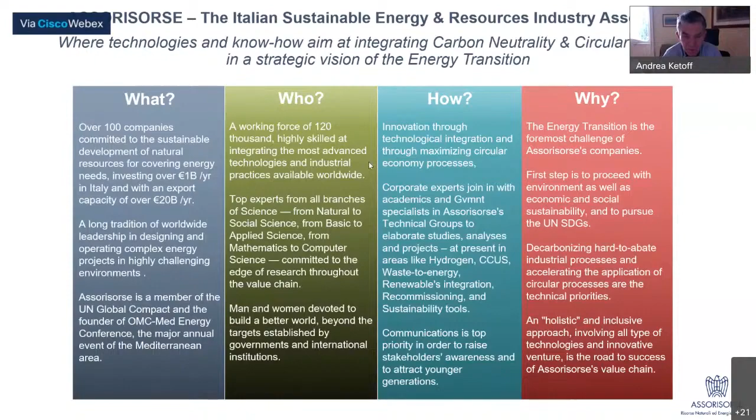Thank you. So thank you very much, Andrea. Thank you very much, Nicola and Paolo, for your kind and important words with respect to the importance of this type of initiative.

So now we are really getting into the award itself. The word goes to Marco Brignoli, who is the scientific committee coordinator of this specific activity. So Marco, the floor is yours.

Thank you, Alberto. First of all, congratulations to the winners of the prize and the mentions, and congratulations to the students who joined this contest. I'm really proud to say that over the 28 years of its existence, 2020 marked really the top success of the contest, as you can see from the statistics we have prepared.

We have received this year 70 theses, which for me is a most significant result, given the hard times we were living through, due first of all to the low price of commodities and the COVID-related difficulties in 2019 and 2020. This means that teaching and science still play a fundamental role in the development of industrial activity.

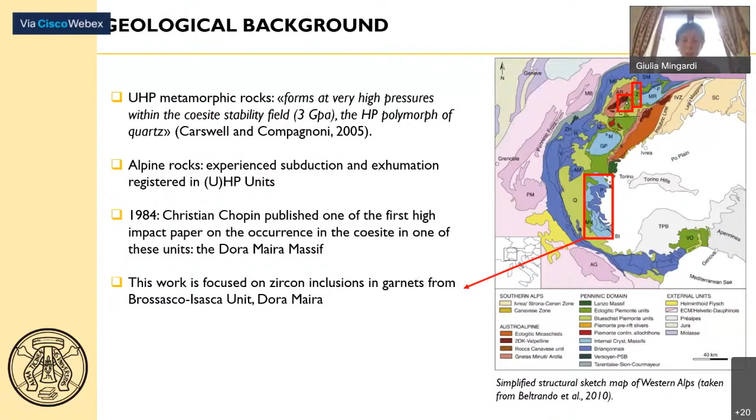The rocks were metapelites, and they are characterized by the following mineral assemblage, which consists mainly of garnet, quartz and coesite, phengite, kyanite, chlorite, and chloritoid that are present also as inclusions in the garnets. But other inclusions are micas and, of course, zircon. A thing that I would like to underline is the fact that the garnet porphyroblasts present in these metapelites show a clear zonation.

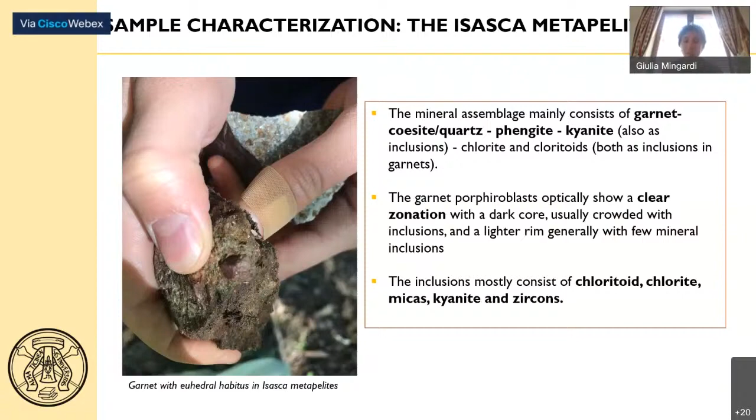So they have a dark core, which is usually crowded with inclusions, and a lighter rim with few mineral inclusions. And this is the place that I considered most for the application of the elastic geobarometry, because for the selection of the inclusion, we should check the following characteristics. They should be monocrystalline, isolated from other discontinuities and inclusions, and that's why the rim is a perfect place to find them, and with a size ranging from 10 to 20 microns.

So after the selection of the inclusions, I performed Raman spectroscopy on completely buried inclusions. And as we can see in the picture, the peak of the inclusion shows a shift with respect to the peak of the standard. This is the starting point for calculating the entrapment conditions, because with this shift, we can calculate the residual strain acting on the inclusion. We are considering zircon inclusions that are tetragonal, so we are considering only two independent components, epsilon 1 and epsilon 3 of the strain, because epsilon 1 will be the same as epsilon 2.

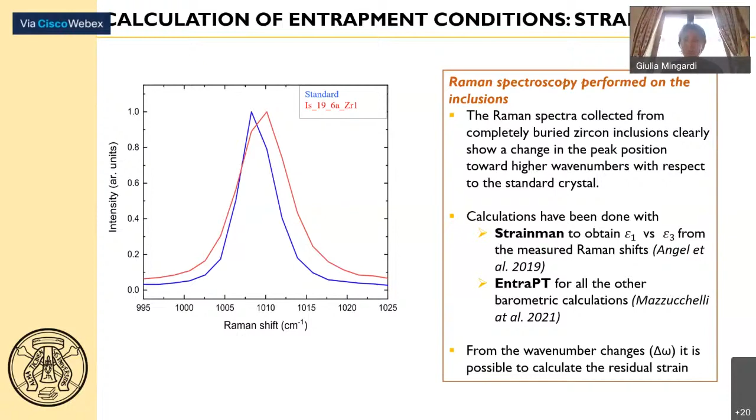I calculated the residual strain from the wavenumber changes with a software that our group developed called Strainman, and then all the other barometric calculations from the strain to the entrapment condition with the software that we developed called EntraPT. So I plotted the strain results in these two plots, which represent the strain data with respect to the independent components epsilon 1 and epsilon 3. In the plots, we can see the red dots that represent the strain data with their confidence ellipses, so an area where we can find the strain with equal probability due to the error.

Then we can see dashed lines that are the isochores, so lines where the volume strain is the same, a blue line which represents the line of isotropic strain, where epsilon 1 is the same as epsilon 3, and the line of hydrostatic stress. As we can see, most of my strain data plot near the blue line of the isotropic strain, but especially in this second plot, we can see a dispersion of the strain along different isochores. Why do we have this dispersion?

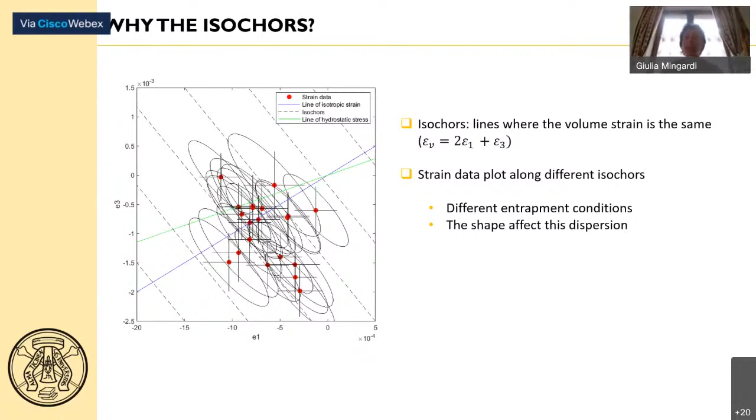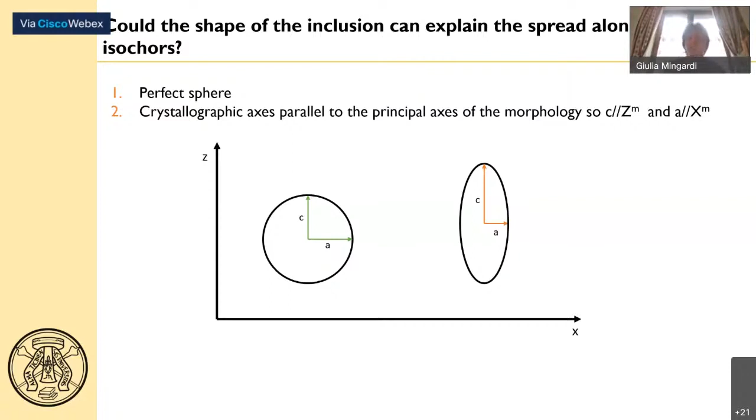So the strain plots along different isochores for two different causes: either different entrapment conditions, but I did not have the time during my bachelor thesis to analyze this aspect, we are working on it, or an effect of the shape of the inclusion. So I created a model where I analyzed two different shapes, a perfect sphere and an ellipsoid with the crystallographic axes parallel to the principal axes of the morphology. And I considered a metamorphic condition, which is in this case 4 GPa and 700 degrees.

And I obtained this result. As we can see, this is the plot of the model that I used. And we can clearly see that the sphere plots along one isochore and the ellipsoid plots along another isochore. So this model that considers the shapes of the inclusion can explain what we have observed in the natural samples. From this point, I was able to calculate the residual pressure acting on the inclusion, and I obtained a mean residual pressure of 0.49 GPa.

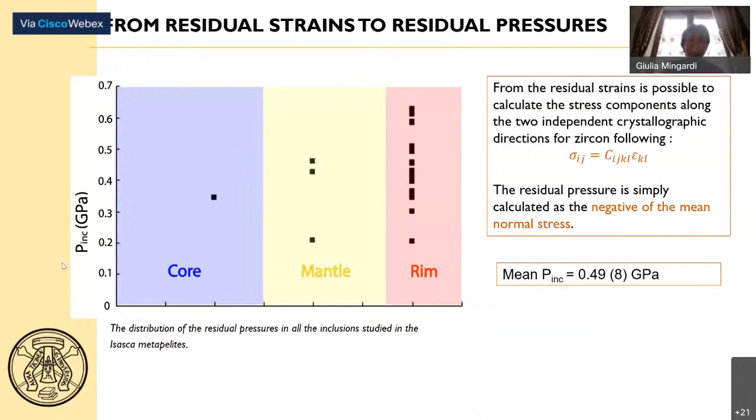I plotted the residual pressure with respect to position in the garnet, so I considered the core, the mantle, and the rim. And also here we can see why the shape is so important in my case, because most of the inclusions are at the rim, so they were entrapped at the same condition. So the shape is very important for understanding the dispersion along the isochores. But we have a problem here, because our inclusions show a very low residual pressure, which translates to an entrapment condition corresponding to 0.5 GPa and 600 degrees.

I plotted my results with the previously published results obtained by Rubatto and Hermann, which show the metamorphic evolution of the Dora Maira. And this was not very good news for us, because we can see that my conditions are very low pressure and 600 degrees for temperature.

But the good news is that we compared my results with the results obtained by Campomenosi et al. on the white schist, which are a different lithology in the same unit of the Dora Maira, and both of our results show the same thing: entrapment conditions at 0.5 GPa and 600 degrees. We explained this situation with a possible reset of the conditions at this point of the PT path of the Dora Maira, and we are now working on it.

So in conclusion, my work represents the first application of elastic geobarometry to the metapelites from the Brossasco-Isasca unit in the Dora Maira massif. We have seen that the dispersion of the strain along different isochores is probably due to the effect of the shape of the inclusion. And my results provide evidence of a general post-entrapment elastic reset of the host-inclusion system along the retrograde path of the Dora Maira massif near 600 degrees and 0.5 GPa for pressure.

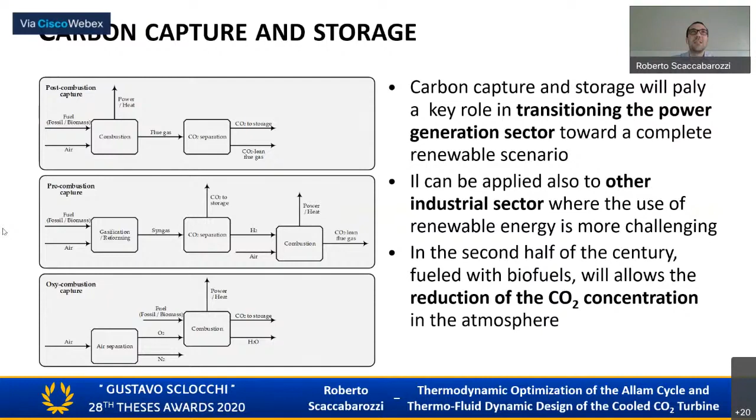You can change the slide. Okay, that's working.

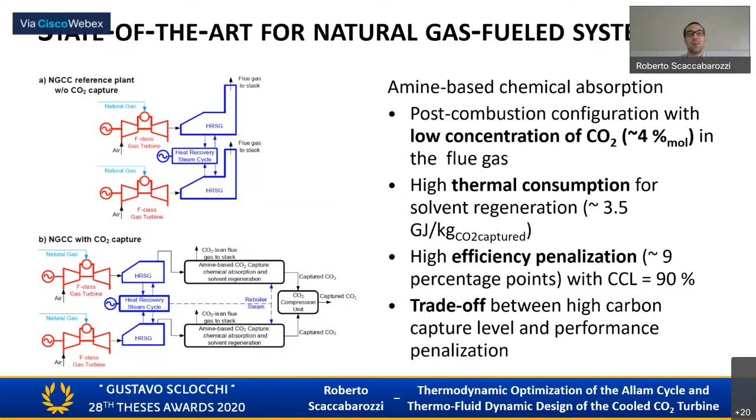Natural gas power system is the amine-based chemical absorption process. It is a post-combustion configuration with low concentration of CO2 in the flue gas and has a high performance penalization. The higher the carbon capture level, the higher the performance penalization derived from the carbon capture system.

On the other hand, the Allam cycle is a semi-closed intercooled regenerative oxy-combustion cycle using CO2 to moderate the flame temperature. First, the working fluid is intercooled compressed up to supercritical condition. Then it is pumped to maximum cycle pressure and it is split. Part is mixed with the oxygen provided by an air separation unit to produce the oxidant stream. Part is used as coolant in the expander, and the remaining part is used to moderate the flame temperature.

All the streams flow through the regenerator and are preheated. Then the oxidant and the temperature moderator are fed to the combustor with the fuel and exit at around 30 megapascal and above 1350 Kelvin. The stream is expanded down to 3 megapascal in the cooled expander, and then it flows through the hot side of the regenerator, providing heat to the cold stream. Finally, the condensation of the water is completed, the water is removed, and a small fraction of the stream is sent to storage.

This is the temperature-specific entropy diagram of the cycle, generated considering pure CO2 as working fluid. At the bottom, there is the intercooled compression with the injection of the oxygen. Then in light blue is the cold side of the regenerator, the combustor in red, the cooled expander in orange, and finally the hot side of the regenerator and the condenser in yellow and green.

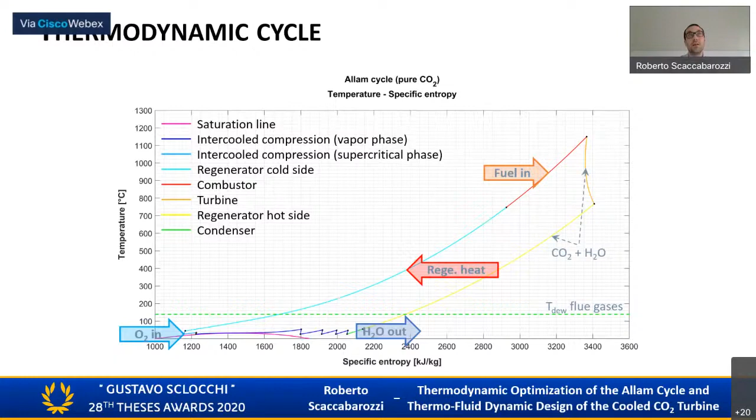According to the inventor, it is possible to reach 60% net electric efficiency with reduced capital cost and a simple layout, and without any kind of emission, both of CO2 and pollutants. An independent study of the IEAGHG partially confirmed the claims of the inventor, comparing the Allam cycle with 3 other oxy-combustion cycles. The results show that the Allam cycle is the best option, both from an efficiency and cost point of view.

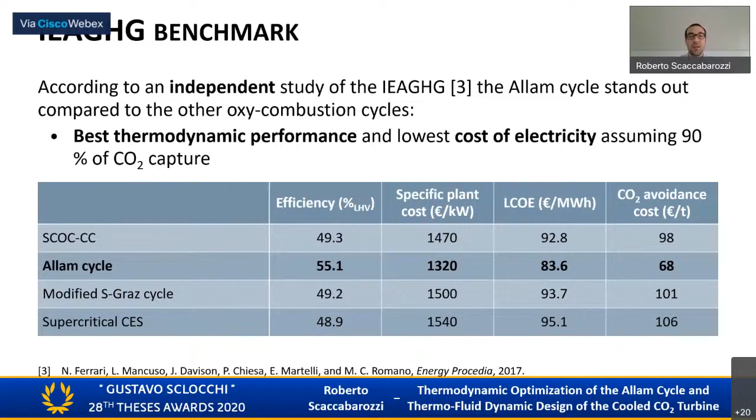The main design challenges of the Allam cycle are related to the high temperature, high pressure components: the combustor, mainly due to flame stability and ignition; the regenerator, due to the high transfer area, the superalloy for the high temperature operation, the corrosive behavior of the condensing water-CO2 mixture, and the high pressure difference of the streams. Finally, the turbine, because it is a first-of-a-kind machine with unknown design criteria, the mechanical resistance of the parts is challenging, and again, the corrosive behavior of the working fluid.

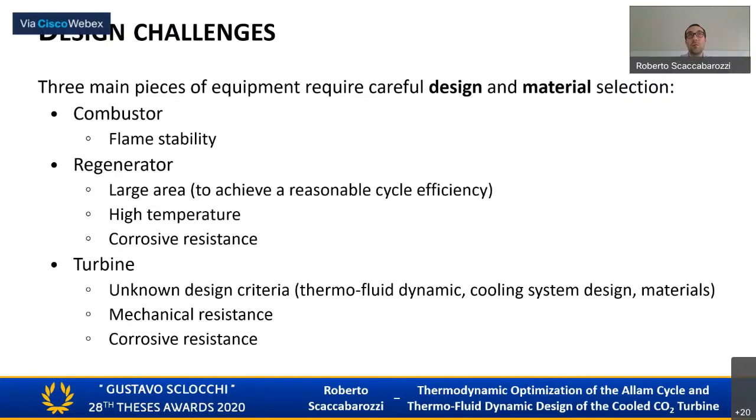8 Rivers Capital is building a 50 megawatt demonstration plant in Texas, aimed at testing the components and actual operating conditions, collaborating with Toshiba, which is providing the combustor and the turbine, with Heatric, which is providing the regenerator, and Air Liquide, which will provide the oxygen from a nearby air separation unit.

The objectives of the thesis: assess the maximum achievable efficiency and operating conditions of the Allam cycle and perform a techno-economic assessment of the technology. Study the preliminary design and performance of the expander. Assess the operational flexibility of the cycle, analyzing the part-load control strategies, and develop a new cycle configuration, coupling it with a solid oxide fuel cell to further increase the cycle performance.

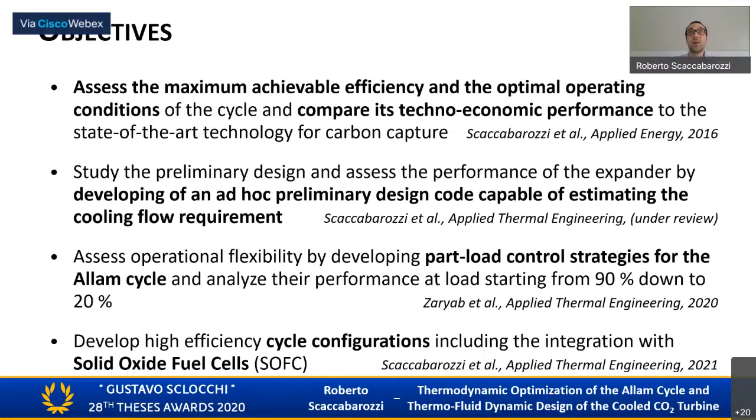investment. The sensitivity analysis shows that the most critical assumptions are the minimum cycle temperature, which affects the performance more than in a conventional combined cycle; the minimum temperature difference within the regenerator, which highly affects the investment cost; the air separation unit specific power consumption, which is the main auxiliary of the cycle; and the effectiveness of the turbine cooling system.

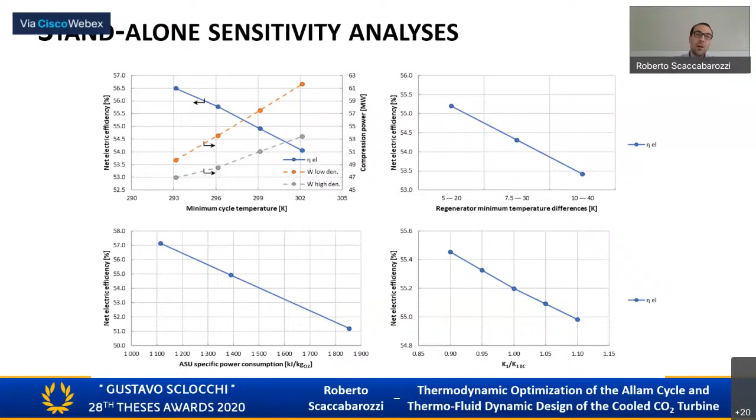The techno-economic comparison with the reference case of the combined cycle with and without CCS, and the second most promising oxy-combustion cycle of the IEA report, the Semi-closed cycle, shows that the Allam cycle remains the best oxy-combustion option and shows a cost of electricity and CO2 avoided less than 10% higher than the actual state-of-the-art technology.

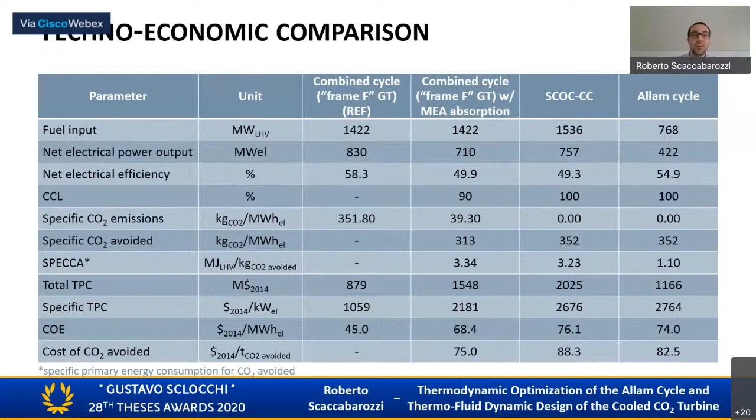So the Allam cycle with optimal operating variables can achieve a net electric efficiency of 55.2%, and accepting a performance penalization of 0.3 percentage points allows reducing the maximum operating temperature of the regenerator below 1000 Kelvin. Finally, the higher efficiency and low carbon emissions allow achieving electricity and CO2 avoided costs only marginally higher than the state-of-the-art technology.

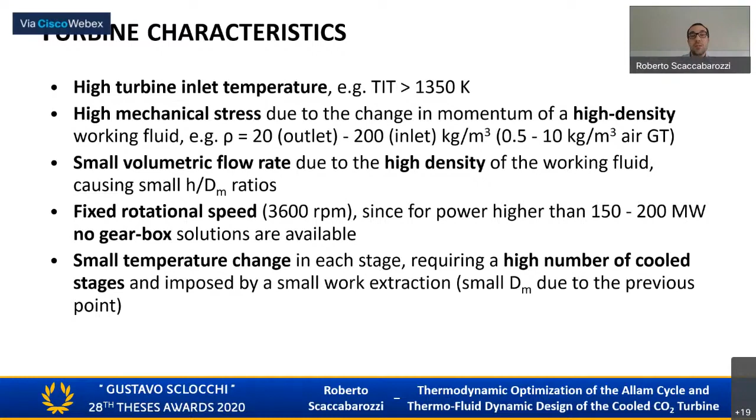Moving to the turbine, the Allam cycle turbine is a high temperature machine with a turbine inlet temperature above 1350 Kelvin, high mechanical stress and small volumetric flow rate due to the high density of the working fluid. Furthermore, the rotational speed is fixed by the electric grid, and it is affected by small temperature changes in the working fluid, and thus a high number of cooled stages. The design problem is a multidisciplinary problem that has to tackle simultaneously the fluid dynamic, mechanical, and heat transfer problems. Furthermore, there are no guidelines to design such a first-of-a-kind machine.

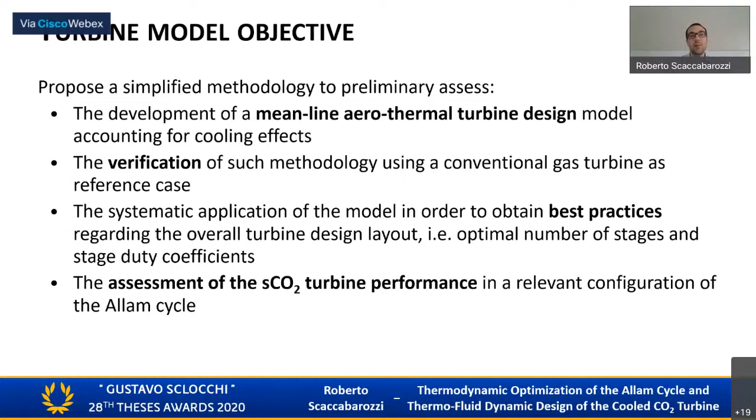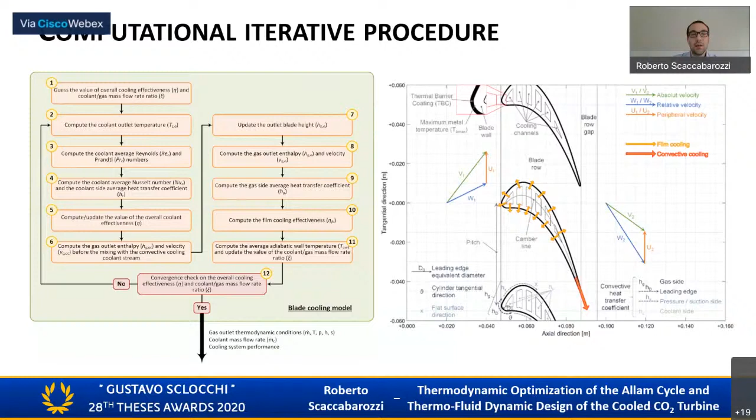Thus, the objective is to develop a simplified methodology to assess the turbine design, its performance, the cooling flow requirement, and their impact on the efficiency. The developed methodology is a row-by-row iterative procedure which divides each row in two sections, the blade row and the blade row gap. In the first section, the mainstream is mixed with the film cooling fraction of the coolant, and in the second, with the remaining part of the coolant. In both cases, the outlet conditions of the mainstream are computed performing energy, mass, and momentum balances.

The results show that increasing the number of stages from 5 to 6 allows increasing the expansion efficiency by 1 percentage point, while obviously increasing the investment cost. Using a front-load configuration and increasing the flow coefficient throughout the expansion is beneficial.

Compared to a conventional gas turbine, the film cooling technology is less effective, and the overall cooling flow requirement of the Allam cycle is smaller.

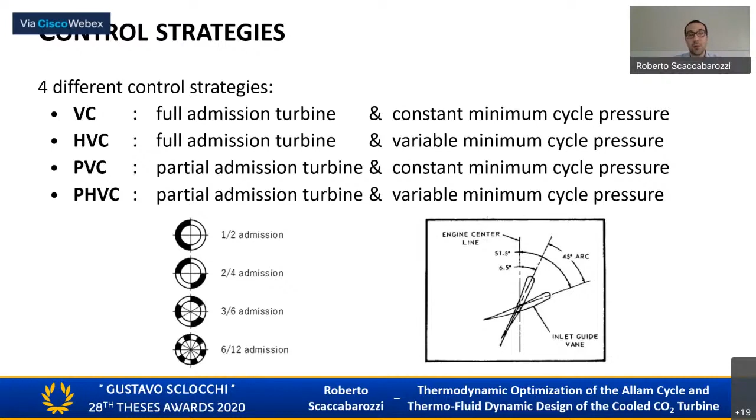Moving to the control strategies, from all the possible combinations of operation modes and constraints, 4 different part-load control strategies combining partial and full admission turbine with constant and variable minimum cycle pressure are considered.

Concluding, reducing the minimum cycle pressure and using a partial admission turbine have a positive effect on the cycle efficiency when the load is below 60%.

Furthermore, using a partial admission turbine is the only way to reduce the load below 30%, achieving better part-load performance and turndown capacity compared to a conventional combined cycle.

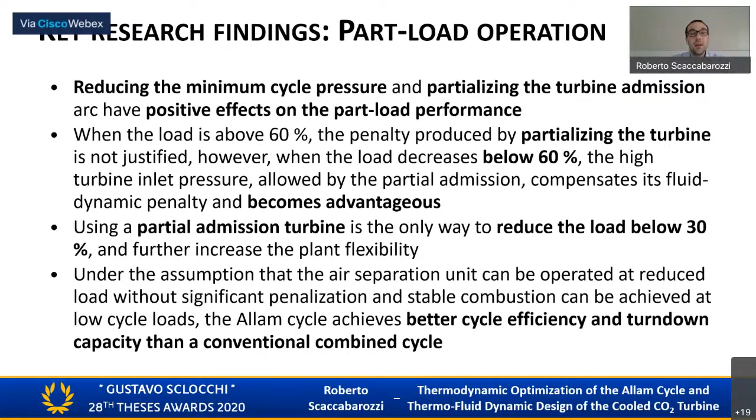Finally, the main goal of the hybrid cycle scheme is to increase the net electric efficiency of the plant while reducing the operative temperature and thus cost of the regenerator.

The objective is achieved by adding a SOFC unit before the combustor. In this case, the oxidant stream, after being preheated in the regenerator, is fed to the cathode side of the fuel cell, while the anode is fed with a mixture of fuel and recycle from the anode.

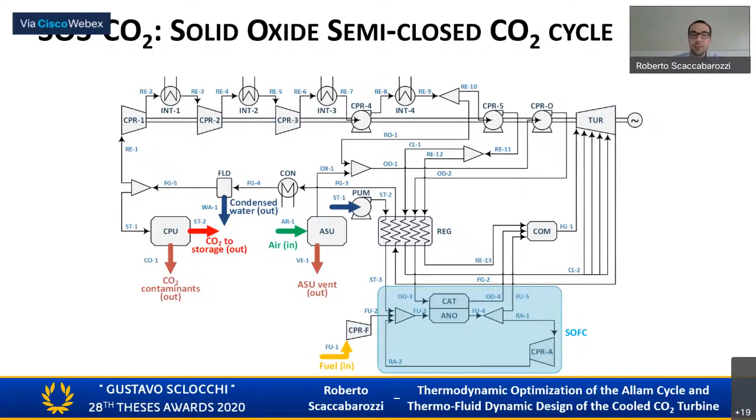The optimal point reaches a net electric efficiency of 75.7%, featuring a SOFC operating pressure of 40 megapascal. And as previously mentioned, the turbine outlet temperature is significantly lower compared to the standalone configuration of the cycle, decreasing from 1000 to 800 Kelvin.

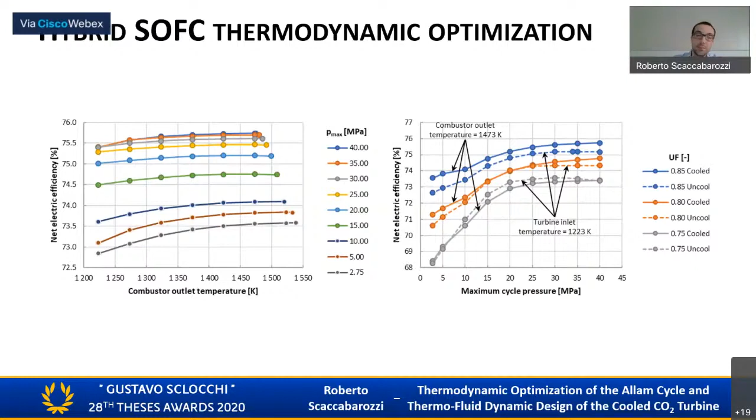So, concluding, the proposed hybrid configuration of the Allam cycle featuring a solid oxide fuel cell is able to achieve a net electric efficiency of 75.7% with challenging operating conditions. On the other hand, the cycle can be designed with less challenging conditions while keeping a net electric efficiency above 73%, or 68% with an uncooled turbine and a lower fuel utilization factor of the fuel cell.

Thank you for your attention. Again, thank you for the award. Thank you very much, Roberto.

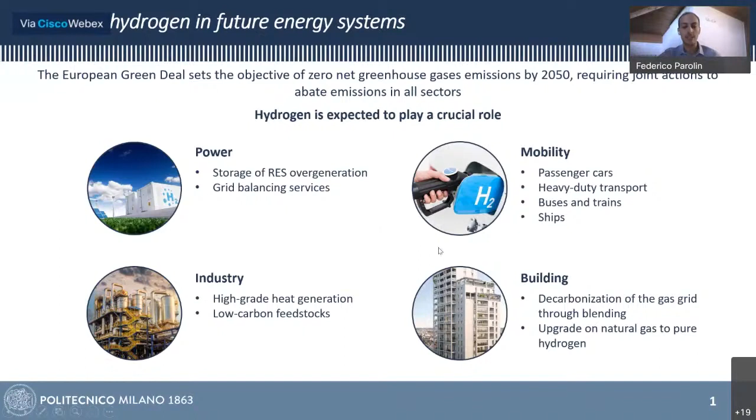Here, the most interesting applications are reported. As you can see, they involve the power, mobility, industry, and building sectors. However, the widespread use of hydrogen is currently hindered by the absence of dedicated infrastructure that allows distributed access to this energy vector.

Within this framework, the objective of the thesis is to develop a tool to optimize the design of the entire hydrogen supply chain.

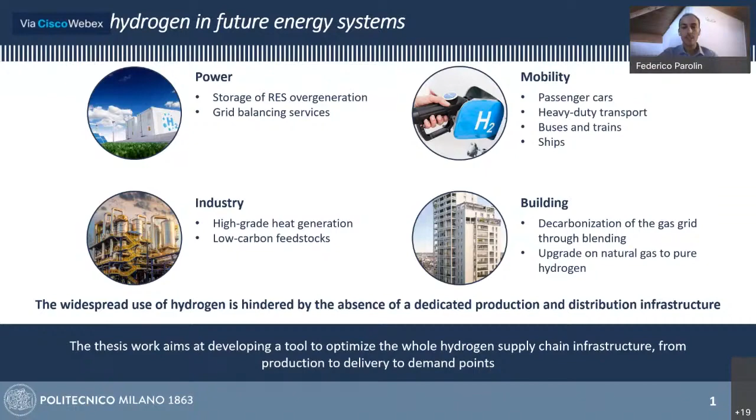When modeling the hydrogen supply chain, common simplifications introduced in the literature are to impose the selection of the transport modalities, to consider a snapshot, so a time-invariant analysis, and to adopt a schematized spatial description not based on actual geographic data.

Having identified these research gaps, the objective of this work is to develop a model that optimizes the selection of the transport modalities, that considers a year-long analysis, and that is integrated with a geographic information system for the spatial description of the supply chain.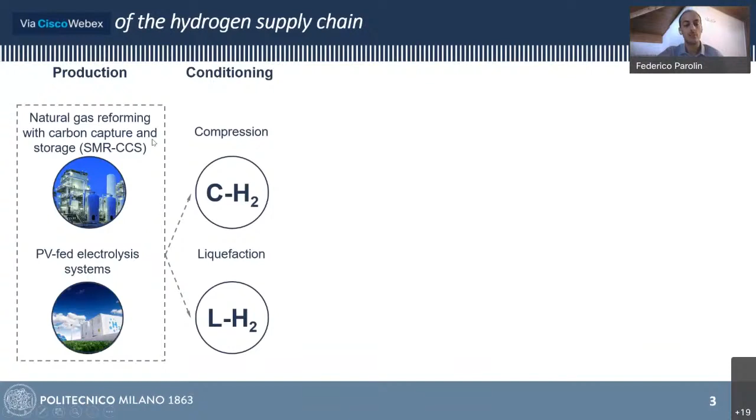The developed model considers the production of compressed or liquid hydrogen via either natural gas reforming or via electrolysis systems fed by solar photovoltaic. The included transport modalities are pipelines, compressed hydrogen trucks, and liquid hydrogen trucks.

Accordingly, the storage can be performed in pressurized vessels, in cryogenic tanks for liquid hydrogen, and in the trailers of compressed hydrogen trucks.

As for demand, the produced hydrogen is here assumed to be exploited by mobility, which implies that refueling stations are the final element of the supply chain.

The spatial modeling of the infrastructure has been addressed by including detailed spatial data of the GIS type. This is essential to obtain a realistic description of the infrastructure, since each stage of the supply chain is subject to geographic and territorial constraints.

So the candidate distribution networks are built on the basis of GIS data, which are available in the shapefile format, thus requiring a proper conversion.

The developed methodology is here presented, referring to the case study of Lombardy, to which the complete model will be applied. The candidate road distribution network is built on the basis of the existing road infrastructure, while it is assumed that pipelines can be installed following the existing railroad network, since it identifies areas where a right-of-way already exists.

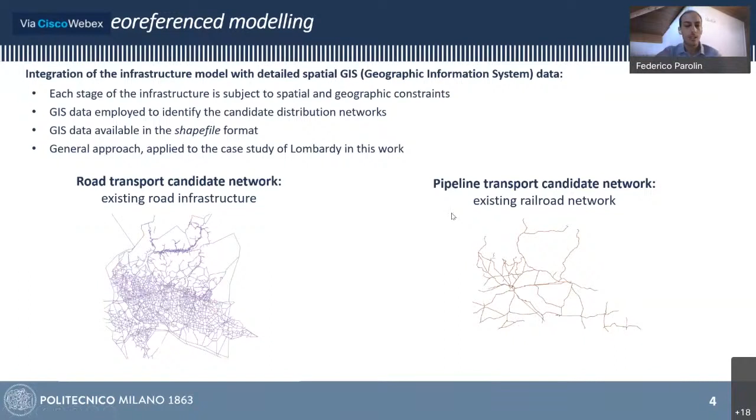Then the position of refueling stations is identified considering the existing gasoline and diesel stations, assuming that 10% of them will host hydrogen refueling. For production, reforming plants are assumed to be located at the refineries of Pavia and Mantova, and the electrolysis sites can be installed at the province's centroids.

Once these input data are defined, the developed methodology, here summarized, allows conversion of the input shapefiles into directed graphs upon which the optimization model is based.

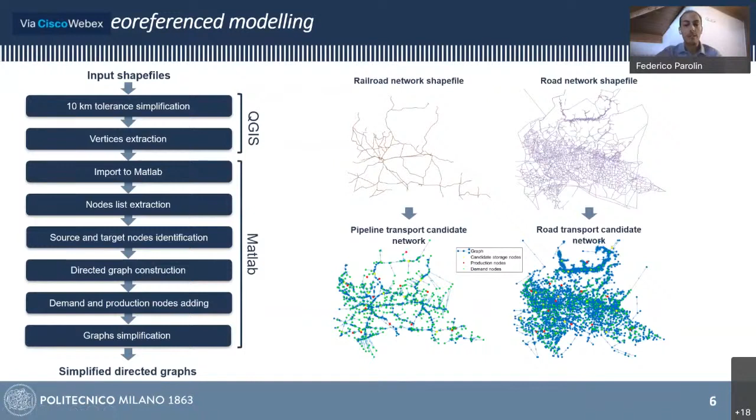The optimization model aims at minimizing the average cost of hydrogen delivered to refueling stations. The complete description of the infrastructure requires the definition of 4 types of nodes in the model: production, intermediate storage, demand, and transit.

As far as the temporal description is concerned, a year-long analysis is considered, adopting a daily resolution. In particular, 52 typical days are identified, and each of them is repeated 7 times in order to build the 52 weeks that constitute the year. In this way, it is possible to maintain a daily resolution while working with only 52 time steps instead of 365.

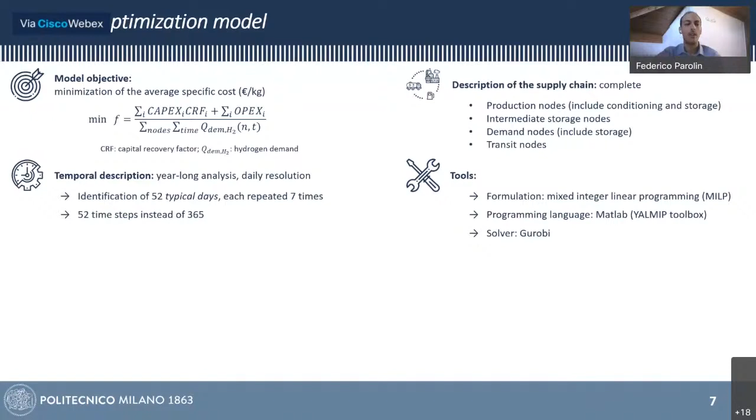The model was implemented in MATLAB, exploiting the YALMIP toolbox and the solver Gurobi, following the mixed integer linear programming formulation, which envisages the co-presence of continuous and integer variables.

Besides the network's topology, the model requires assigning the demand and PV generation profiles, as well as the production and storage capacity limits. Then the infrastructure is optimized at each node and edge of the graphs in terms of the exploited transport modalities, the installed production and storage capacities, the hydrogen flows, the exploited transport pathways, and the transported quantities.

This slide shows a schematization of the hydrogen pathways in the model. As a consequence of the spatial modeling, there are two graphs, one for road transport and one for pipeline transport, while hydrogen sources and sinks are unique.

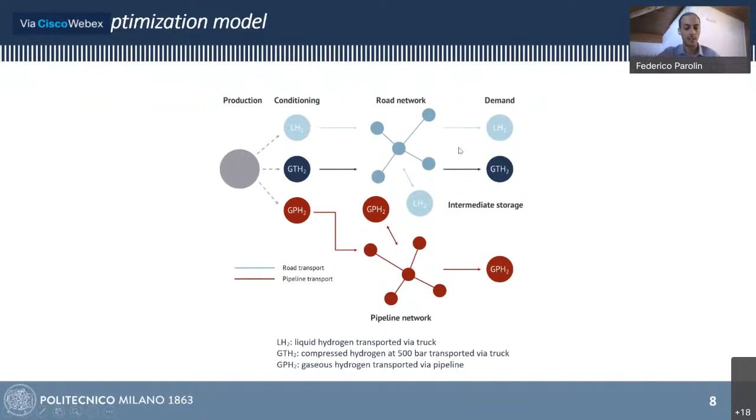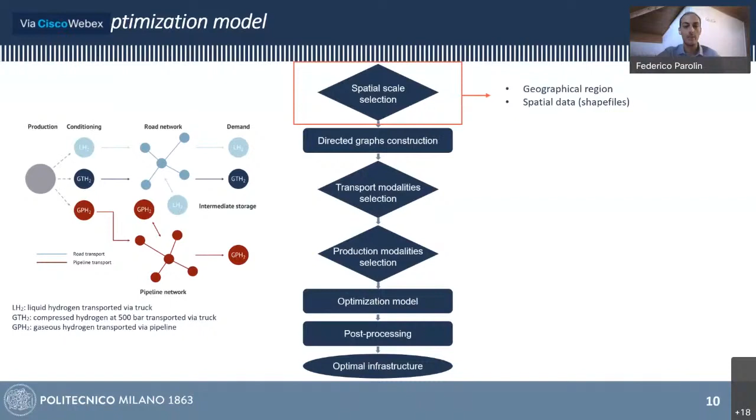According to the model decision logic, schematized here in a block diagram, the first selection the model requires is that of the spatial scale in terms of the geographical region to study, and therefore of the shapefiles to employ, which are then converted into directed graphs representative of the candidate distribution networks. Then the model requires selecting the transport modalities to include in the simulation.

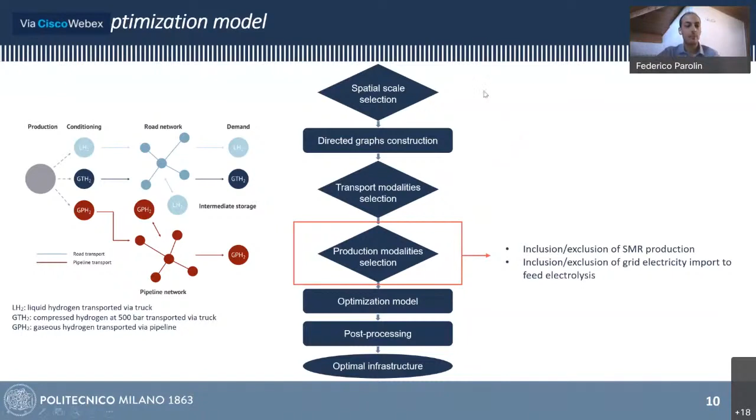Since it is possible to perform both monomodality and multimodality simulations, and similarly it is possible to include or exclude the production from refineries or the import of grid electricity to feed the electrolyzers. Once these input choices are defined, the model optimizes the infrastructure according to the previously presented modalities.

The model has been first tested and validated on a simplified topology, which allowed testing and introducing a set of adjustments aimed at improving the model's computational performances. In this way it was possible to scale up the model to the regional case of Lombardy, for which a multimodality simulation is completed in about 40 hours.

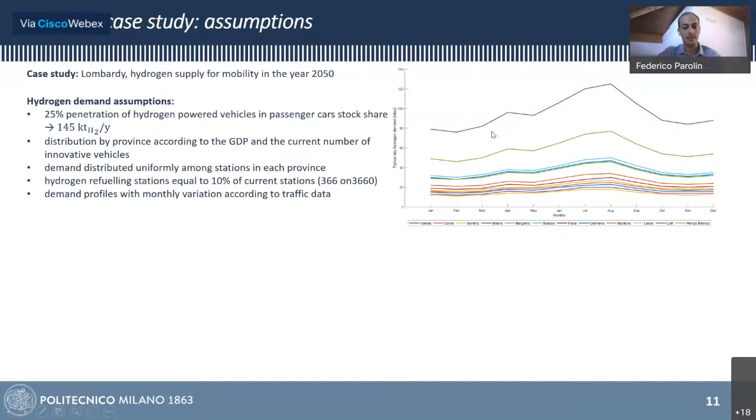In the definition of the case study, the year 2050 is considered as a reference. In particular, it is assumed that hydrogen-powered vehicles account for 25% of the passenger cars stock share, which is reflected in an annual demand of 145 kilotons. The annual evolution of the demand is then computed on the basis of traffic data.

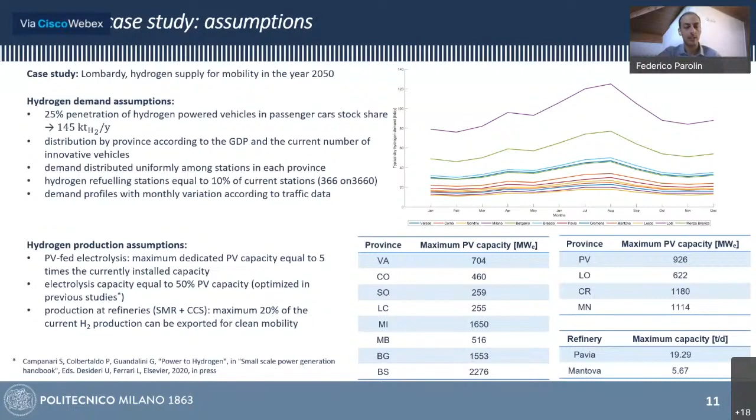Considering production, it is assumed that the maximum dedicated PV capacity that can be installed to power the electrolyzers for each province is equal to 5 times the currently installed capacity. For refineries, it is assumed that a maximum of 20% of the hydrogen production will be exported for clean mobility.

This slide shows the exploited distribution networks for the included transport modalities. Having to supply most of the stations, the pipeline and liquid hydrogen truck networks are very extensive, while the road network exploited by compressed hydrogen trucks is more restricted, confirming that this transport modality is suitable for small delivery requirements.

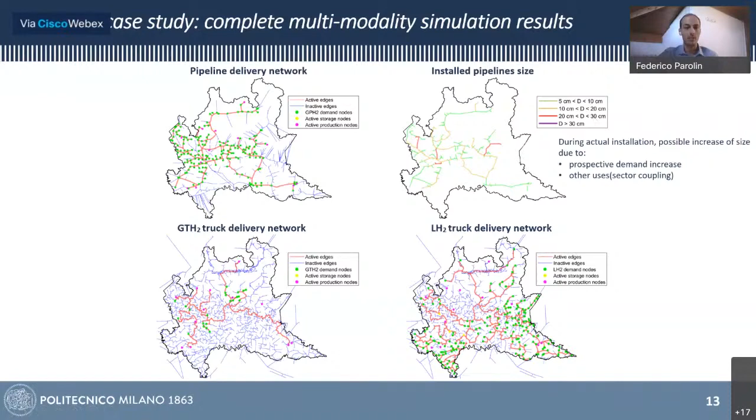The installed pipelines have a diameter lower than 30 centimeters, even though these results are optimal for the assumed demand, and during an actual installation the sizing could be larger in perspective of future demand increase or of other hydrogen uses.

This chart shows the cost of hydrogen reached by stations, considering them separately according to the transport modality that supplies them. The highest cost is reached by stations that receive liquid hydrogen via trucks, with a value higher than 7 euros per kilogram, while the lowest cost is achieved by stations supplied via pipeline, with a value of 5.20 euros per kilogram. The chart also shows that the transport cost contribution is mainly due to pipeline installation.

The intermediate storage costs are related to liquid hydrogen only, since it is the only modality for which intermediate storage sites are exploited. The greatest contribution is definitely that of production, for which PV installation costs account for more than 40% of the overall production expenses.

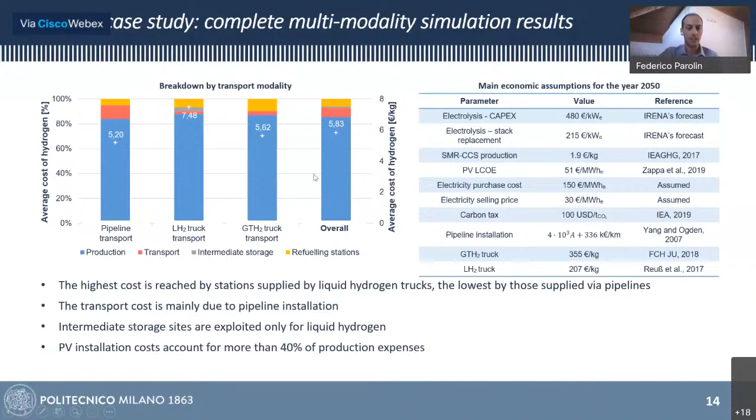So to conclude, besides the results, the developed model represents a tool that could help decision makers or industrial players evaluate the adoption of hydrogen. Thanks to its characteristics, it allows obtaining a higher level of detail with respect to what can be found in the literature.

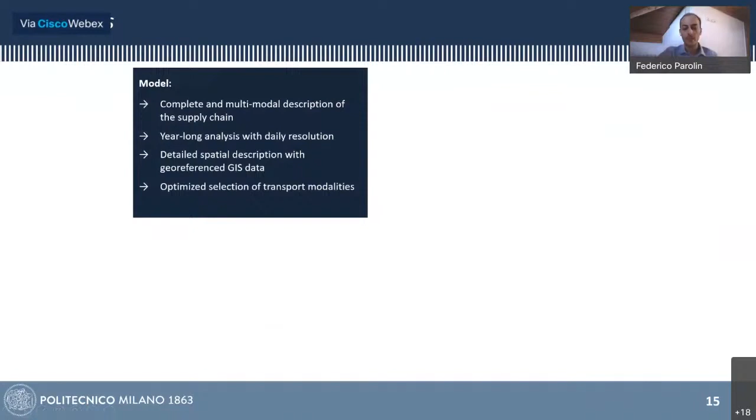The application of the model to the case study of Lombardy allowed us to show that in this region, an average cost of hydrogen of 5.83 euros per kilogram is reached, with an overall investment of about 6 billion euros, corresponding to 1.6% of the region's GDP.

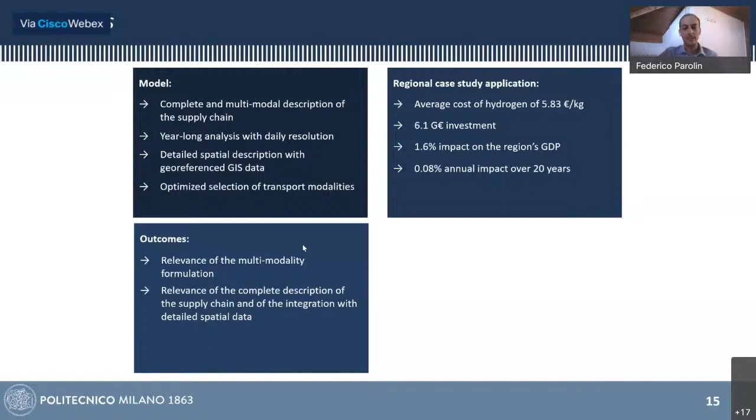And the application also proved the relevance of the multimodality formulation and of the integration of the optimization model with detailed spatial data. In terms of future developments, it is interesting to evaluate the inclusion of additional storage and transport technologies so as to widen the comparison, or to apply the model to other hydrogen end uses, like, for example, considering the future hydrogen demand of the industrial sector.

An alternative path, which is also interesting, is to pursue the improvement of the model computational performances with the ambition to apply the model first on the national scale and then even on European scale. So thank you for your attention, and I hope the presentation was interesting.

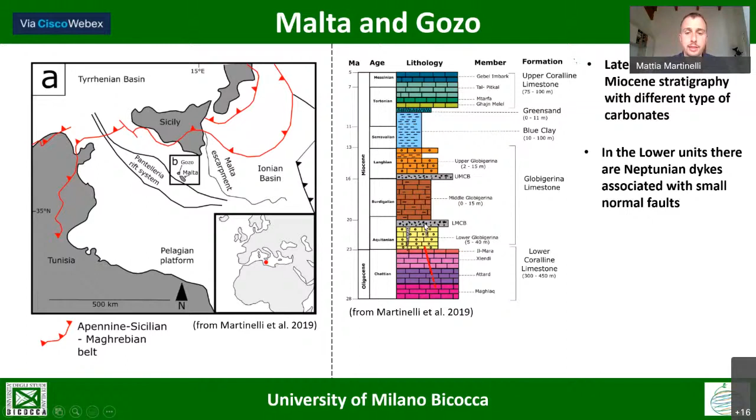with small normal faults. Moreover, more important for our project is that the two islands are characterized by the presence of two sets of normal faults trending west-northwest, east-southeast, and east-northeast, west-southwest.

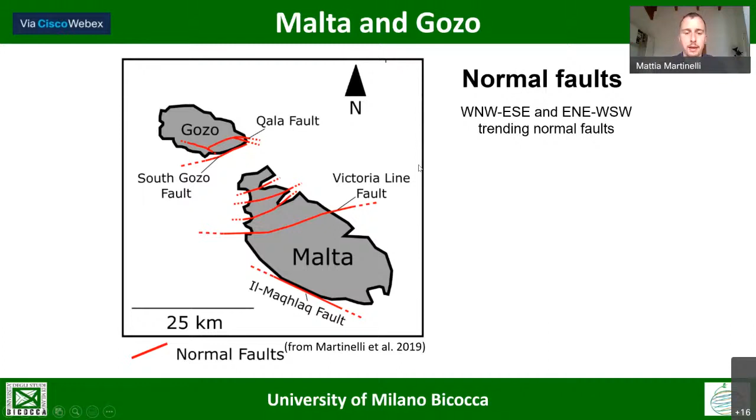So we decided to apply a multidisciplinary approach that moved from the tectonic evolution of the islands to, at the end, realizing a small DFN model of the fracture network. We will see the 4 main topics in detail. So we can start from the first one, the tectonic evolution.

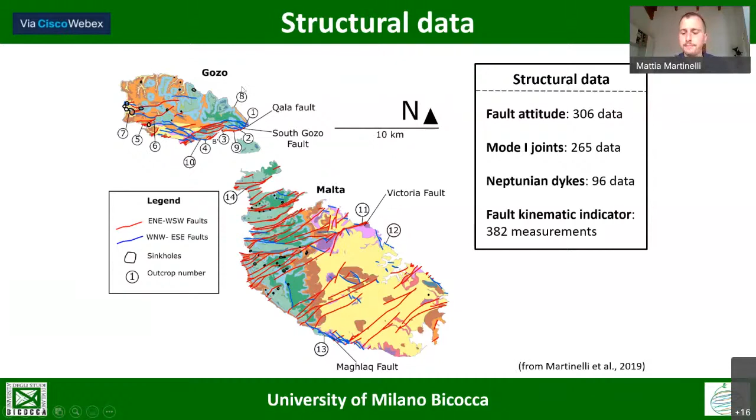To characterize it, we collected different types of structural data, from fault attitude to fault kinematic indicators, in 14 different outcrops in both Malta and Gozo. And these allowed us to recognize the type of sets and also the faults present.

So as I said before, we found 2 main sets of normal faults associated with 4 sets of joints that you can see here below. And moreover, we recognized also the Neptunian dikes associated with small normal faults.

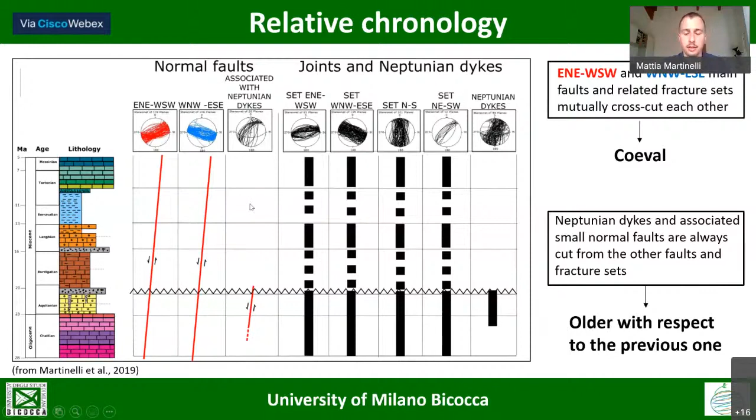So bringing together also the relationship between the faults, the dikes, and the joints, we were able to recognize the relative chronology of the structures. So basically you can see that the big faults, so the 2 main sets of normal faults and the joints, are present throughout all the stratigraphy, while the Neptunian dikes and the associated small normal faults are present only in the lower units. And this testifies that the Neptunian dikes and these small normal faults were formed in older events with respect to the other tectonic structures.

From the late Oligocene onward, the Maltese Islands underwent two main tectonic events. The first, which we call D1, occurred between the late Aquitanian and early Burdigalian, and led to the formation of the Neptunian dikes and associated normal faults with a west-northwest, east-southeast extension.

Then we had a period of tectonic quiescence with no deformation. From the Messinian onward, deformation started again with a north-south extension that led to the formation of the main faults of the two islands.

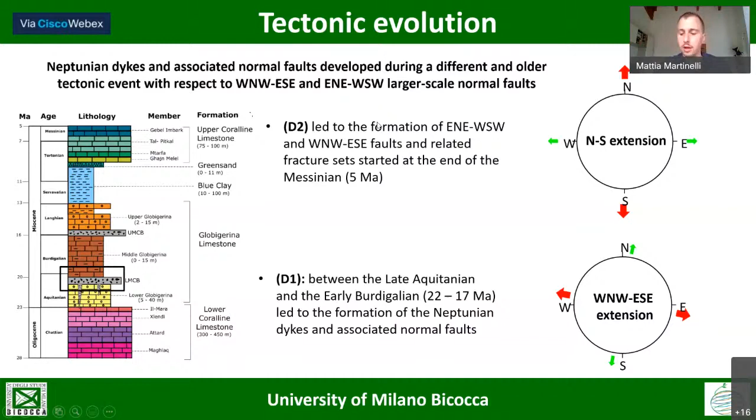We also tried to insert this interpretation inside the geodynamic evolution of the Mediterranean. We can see that during the late Oligocene, during the deposition of the lower coralline limestone, we had a trench that was moving to our south with a slab that was rolling back.

This rollback in the Aquitanian, early Burdigalian, brought the trench really close to the Maltese Islands, causing deformation due to the slab rollback, and caused the first event of deformation.

Then from the Burdigalian to the Messinian, the slab rollback ceased, and also ceased the deformation on the Maltese Islands, as testified by the absence of deformation structures in the units that were depositing.

Then at the end, from the Messinian, the slab rollback started again, this time with a south direction. This caused the start of the second deformation event, a north-south extension that created the main faults of the two islands. So the main conclusion of this first part is that from the late Oligocene to the Pliocene, the Maltese Islands underwent two main deformation events.

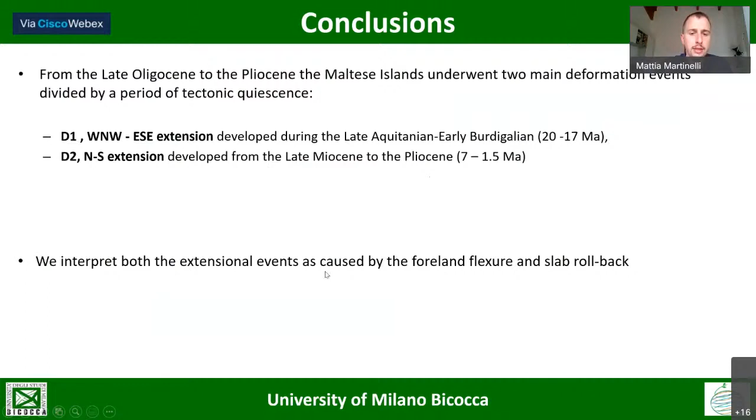Divided by a period of tectonic quiescence, we interpret both extensional events as caused by foreland flexure and slab rollback.

Now that we reconstructed the tectonic evolution and also the fault and fracture types on the two islands, we can concentrate our attention on fracture parameter characterization. We decided to characterize the fracture parameters, in particular the effect of normal deformation on the fracture network on Gozo Island, and in particular on the Qala fault, a fault located in the eastern part of Gozo.

In particular, on this fault that we call the Qala 2 fault, which is a small fault with 30 meters of displacement, so not a very big fault. But this outcrop is really interesting because here the lower coralline limestone, as you can see, is outcropping and visible for almost 1 kilometer.

So we were able to characterize the evolution and fracture parameters from the fault zone to the background. In the field, as you can see in this sketch, we recognized a highly fractured zone close to the fault, and then a wide but less damaged area, almost 800 meters long, that we call the outer damage zone, before the background.

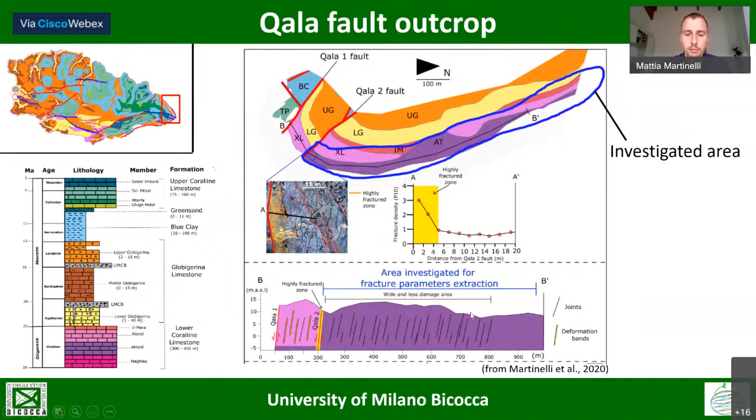To characterize the fracture network here, we applied a new method that requires two steps. The first step requires applying a linear scanline on the outcrop to basically characterize the spatial distribution of the fracture network using statistical analysis. This is important because it allows us to define homogeneous areas.

As you can see here, we have fractures uniformly distributed, here we have a fracture corridor, and here we have randomly distributed fractures. Once this area was identified, we applied a scan area on it to have statistically valid information to extract the main fracture parameters: density, intensity, length, spacing, and topology.

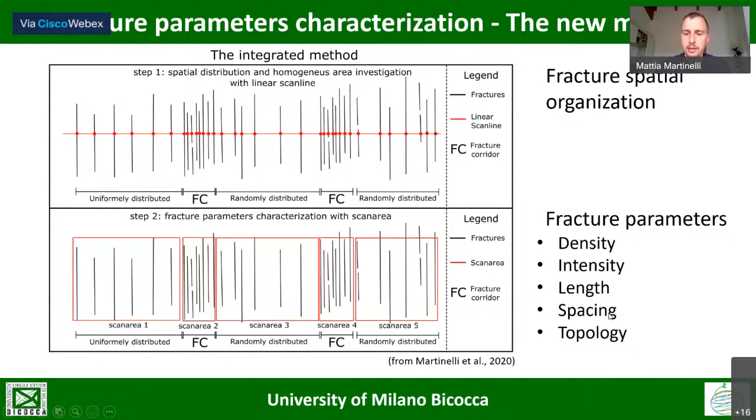Of course, this type of analysis performed directly on the outcrop would take too much time. So we decided to create a digital outcrop model with a photogrammetric reconstruction. We reconstruct a dense point cloud with drones, then extract an orthophoto, and then interpret the fracture network on the orthophoto.

We then imported our interpretation and our digital outcrop model inside SkuaGOCAD, a 3D model software that has a plugin allowing us to write Python scripts. So we wrote original Python scripts to be used in this software to automatically apply this linear scanline analysis.

You can see here an example of the joint set that is northeast-southwest. Thanks to the linear scanline analysis, we recognized the presence of 4 fracture corridors intercalated with randomly distributed fractures. So in the scan area analysis, we applied a dedicated scan area on each fracture corridor.

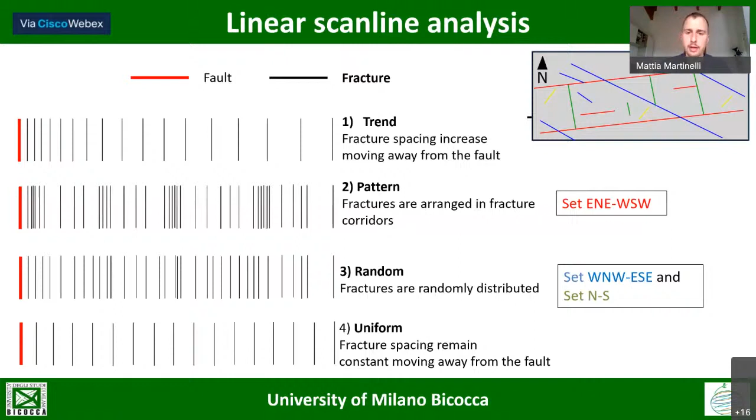Now that we individuated these homogeneous areas, we can apply the scan area analysis. One question is: what is the right dimension of the scan area to have statistically valid information about the fracture parameters? So we decided to use the representative elementary volume, which basically works in this way.

When we are measuring a property and start to sample it with a volume or an area, with a small volume the property oscillates around the mean value.

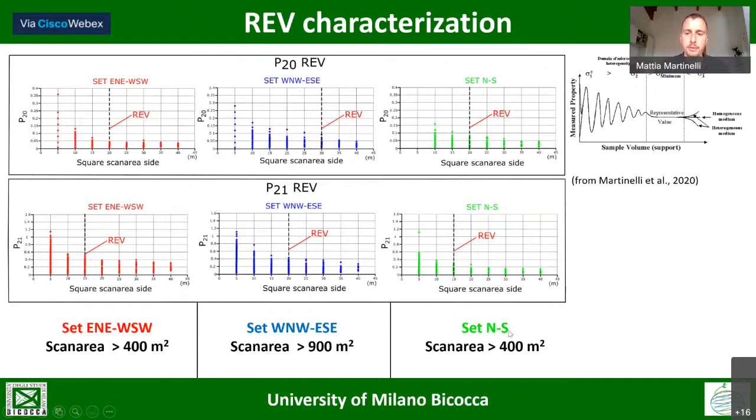But when we reach the representative elementary volume, this property tends to stabilize around a mean value. So we wrote, again, some Python script to be used inside GoCAD. And we found that for the density and intensity, and also for the other parameters, for the set northeast-southwest the scan area should be 400 square meters or more. For the second set, 900 square meters or more, and for the set north-south, again, 400 square meters.

Then we apply on our digital outcrop model the scan area to characterize the evolution. As you can see here, we have the fault, and then the outcrop. You have to imagine the outcrop here, that we are moving away from the fault. So basically, we were able to characterize, here in this slide, you have the density and the intensity, but we also characterized length, spacing and trend. But we will speak only about density here, only as an example.

You can see here that we have the inner damage zone that we characterized at the beginning. And then you can clearly see that the density in this set remains constant until the background is reached, if we, of course, exclude the fracture corridors that are this red area.

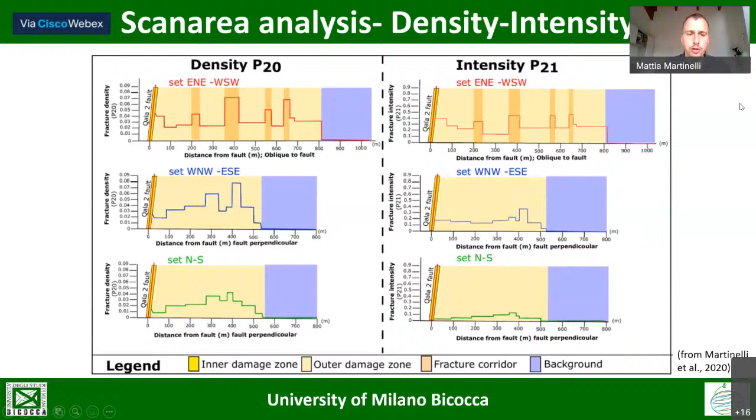So to conclude this part, we recognize that in the Qala fault, the damage zone structure is divided into an inner damage zone, only 5 meters thick, and then an outer damage zone, more than 500 meters thick, where the average parameters remain stable if we exclude, of course, the fracture corridors. But for me, the most important thing is that we demonstrated that even a fault with a very small displacement can be surrounded by a relatively large permeable damage zone that is really important for fluid flow.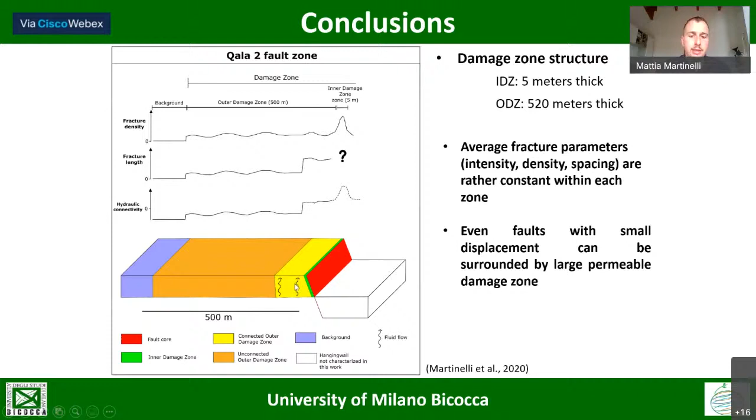We can move to the third topic. So we tried to understand why this small fault has such a big damage zone. So we tried to identify if there is an effect of the mechanical stratigraphy. So if we go to the field and we observe the lower coralline limestone and the lower globigerina limestone, we can see that the lower coralline limestone is characterized, as we saw before, by a very large damage zone, while the lower globigerina is characterized by a damage zone that is only present very close to the fault zone.

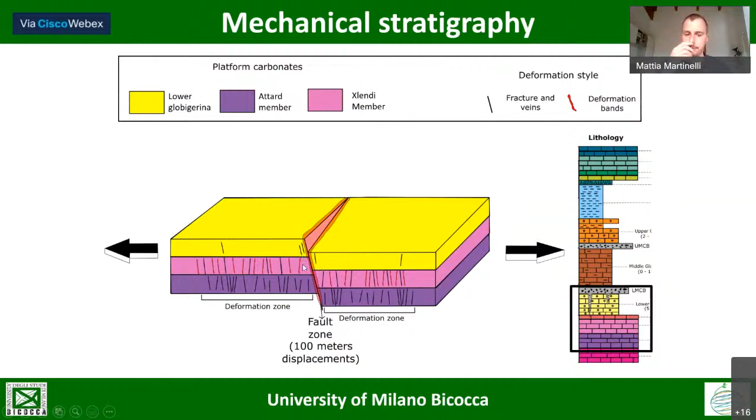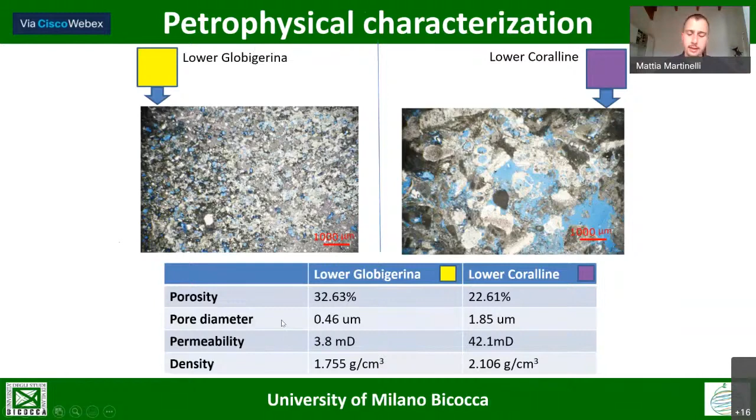So to explain this behavior, we performed a complete petrophysical characterization with porosity, permeability, and density, but also a geomechanical analysis with Brazilian, uniaxial and triaxial tests that allowed us to reconstruct the complete failure envelope of the lower globigerina and of the lower coralline limestone. And what we can see is really interesting, because the lower coralline limestone is stronger with respect to the lower globigerina, as you can see here from the uniaxial compressive strength. But the Young's modulus is higher in the lower coralline limestone, while the Poisson ratio is similar in both formations.

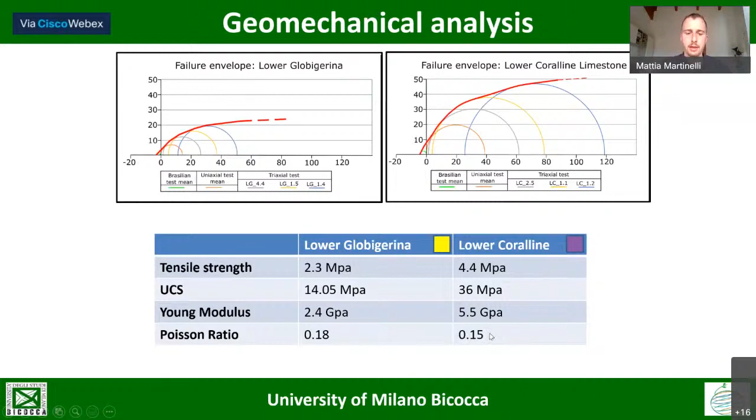We apply 2 steps. In the first step, we apply the vertical stress with the kinematic boundaries fixed to simulate the overburden. And then in the second step, we start to move the lateral boundaries in order to simulate the extension, that is the second extension event that we saw at the beginning of the presentation.

And the result is very interesting. You can see here we have the two formations, so the lower coralline limestone and the lower globigerina. And as a proxy of the deformation, we use the plastic strain, that is basically a scalar value used to represent the inelastic deformation of the rocks. So when it is 0, we do not have fractures.

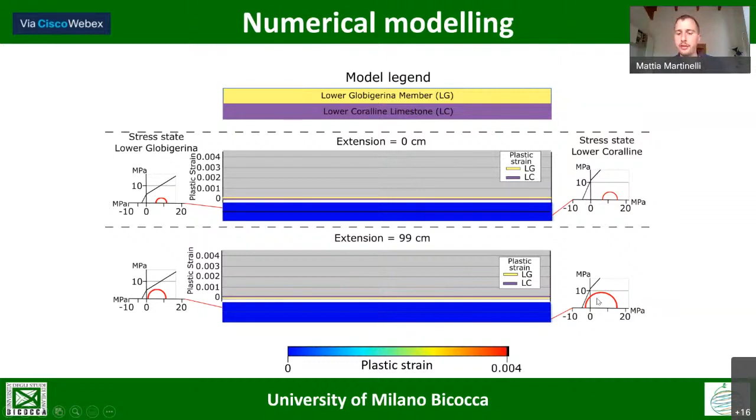When it starts to be above 0, we are starting to fracture in the formation. So we start the extension, as you can see here. And the interesting thing is that if you look at the Mohr circle, you can clearly see that in the lower coralline limestone, the sigma 3 decreases faster with respect to the lower globigerina.

And this is due to the different elastic properties of the two rocks. Indeed, the Young modulus is very different, while the Poisson ratio is similar. This means that the lower globigerina, that has a lower Young modulus, can expand more laterally with respect to the lower coralline, and this creates a pressure that goes in the opposite direction to sigma 3, and this prevents it from decreasing too fast.

And this is the reason why the lower coralline limestone broke before. As you can see here, we have green color. This means that the rock is fracturing, while the lower globigerina is still completely intact. And then the fault.

Sorry, yes? I need to ask you to proceed towards the conclusions. Okay. Thank you.

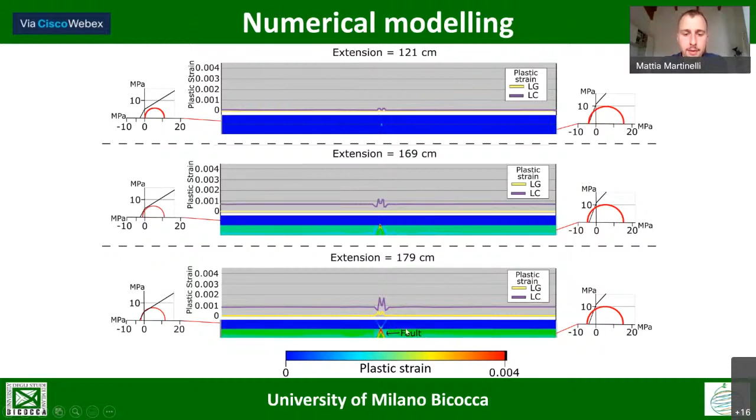Okay, so you can see that the faults start to propagate, and then the globigerina limestone basically remains intact with only a small damage zone around. So I go very fast to the conclusion. I have just 2 minutes.

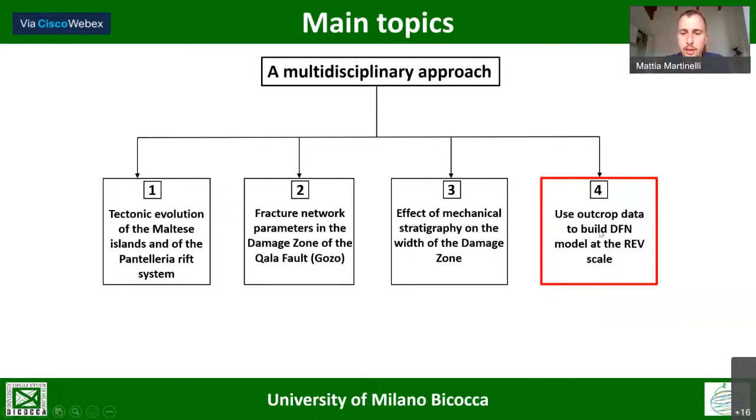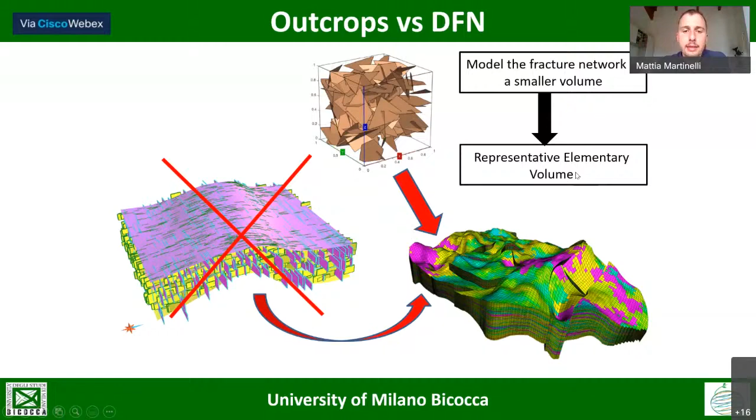So we also tried to understand how to use outcrop data to build the DFN model at the REV scale, because when we are dealing with outcrop data plus well data, we can characterize better the fracture network. But when we try to put this information inside the DFN model, it's impossible to model all the fractures at the reservoir scale. So we can try to model the fracture network in a smaller volume, and this volume can be the representative elementary volume that we saw before.

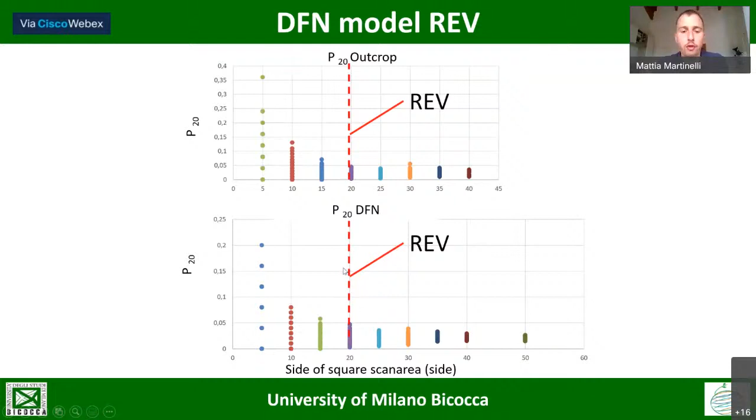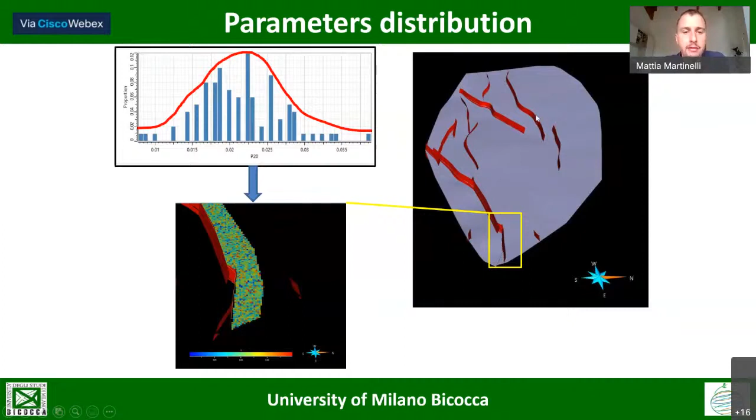So basically, the idea is that if we use the representative elementary volume that we characterized before in the outcrop, we can create several DFN models at the representative elementary volume scale, creating a histogram of the property, in this case the density, and use this histogram to populate the reservoir instead of running a complete DFN model of the reservoir. So this can help to reduce computation time, and also, it's something that we didn't study, but it can also help to perfectly honor the fracture connectivity and topology.

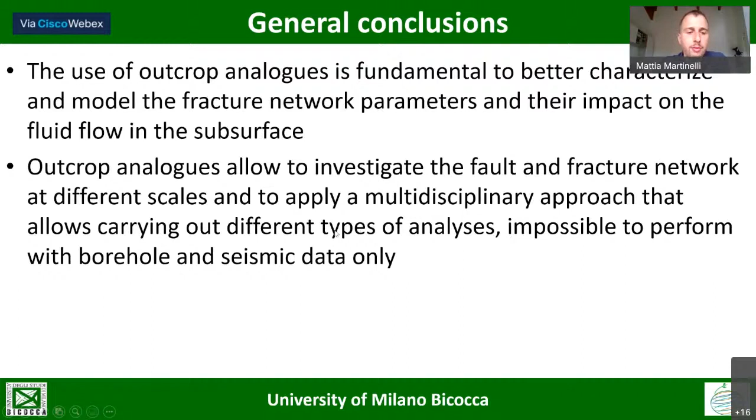So to conclude, the general conclusion of this thesis is that the use of outcrop analogs is fundamental to better characterize and model fracture network parameters and their impact on the fluid flow in the subsurface. And outcrop analogs allow us to investigate the fault and fracture network at different scales and to apply a multidisciplinary approach that allows carrying out different types of analysis that are impossible to perform with borehole and seismic data only. And thank you for your attention.